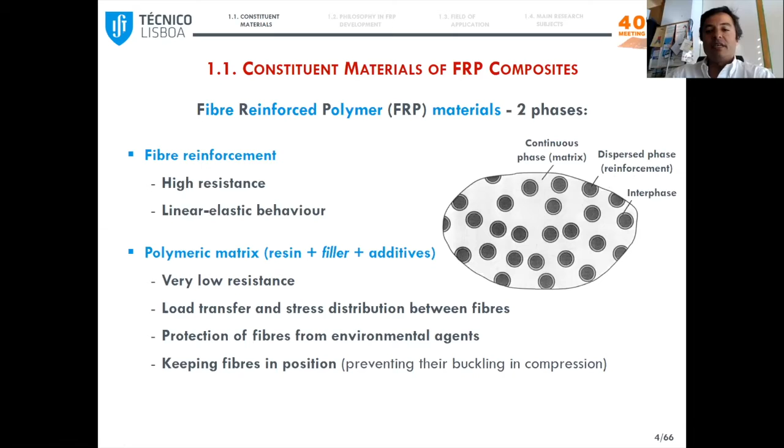So starting with the overview of FRP composites, these materials are basically constituted by 2 phases: the fiber reinforcement, which has high strength and linear elastic behavior, and this would raise a red flag for earthquake engineering, and also the polymeric matrix, which includes resin and usually also filler and additives. The matrix has much lower strength than the fibers, but on the other hand, it has 3 very important functions: load transfer and stress distribution between the fibers, their protection from environmental agents, and also keeping them in position, namely when they are loaded in compression.

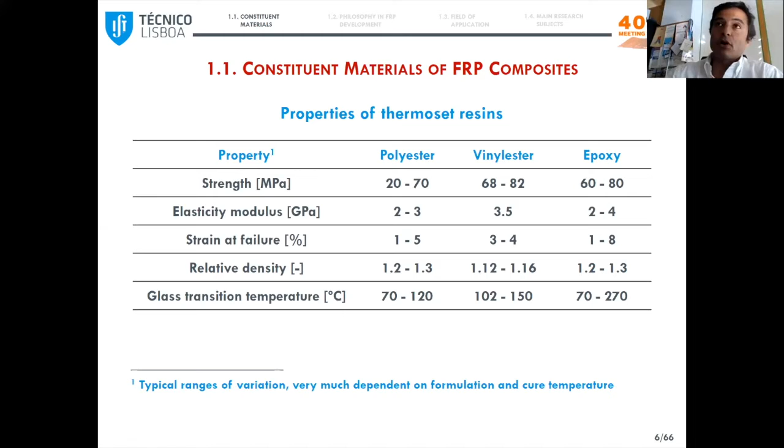Now let's look at the thermoset resins that are more often used with FRPs. You can see that their mechanical properties are relatively similar, being 1 to 2 orders of magnitude lower than those of the fibers. The most relevant difference between these resins is basically their ability to bond the fibers and their durability, which is maximum in epoxy and minimum with polyester.

So the philosophy in the development of FRP materials is that depending on the specific requirements of a given application, it is possible to select the most appropriate manufacturing method and to combine different types of fibers, varying their type, content, position, and orientation, the type of polymer resin, and also the additives and fillers to obtain specific properties. So there is plenty of room for engineering or multifunctionality.

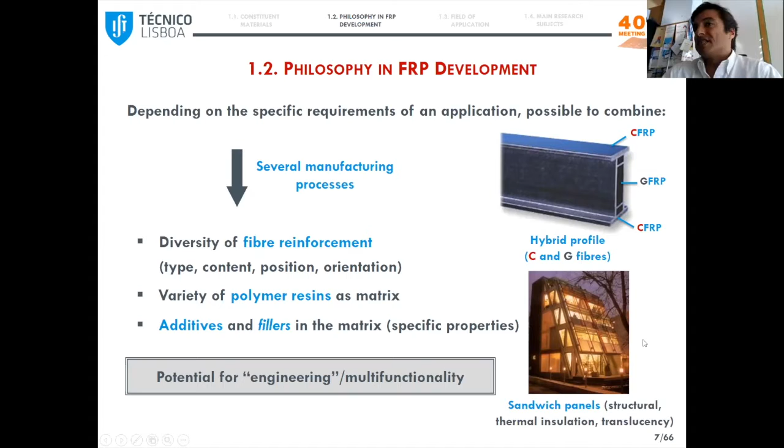Let me give you two simple examples. One is this hybrid profile, where glass fibers are used in most of the profile, but where carbon fibers, which are more expensive, are used in the flanges where they are more useful. And also the sandwich panels used in this building with several functions, not only structural, but also thermal insulation and lighting.

In this slide, I divided the structural application of FRP materials in four main groups: the external strengthening of concrete structures, where strips and sheets are often used, and the internal reinforcement of concrete structures with FRP rebars.

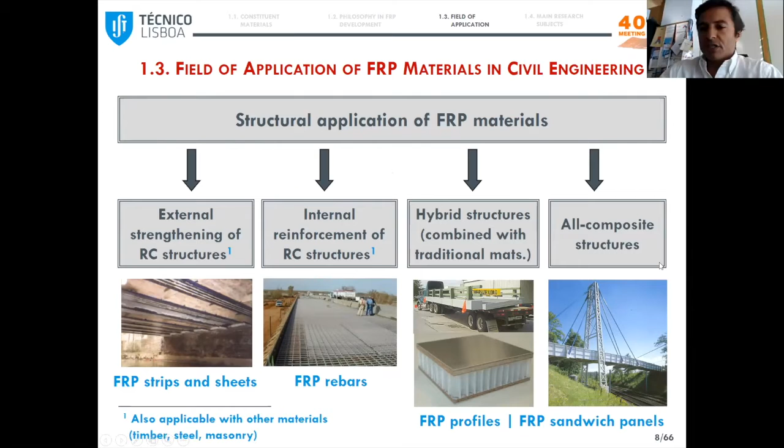Hybrid structures, where profiles and sandwich panels are used in combination with traditional materials, and all-composite structures, where these components are used alone.

This is a bit of a crowded slide. I listed for each of these four types of FRP products the main research subjects that have been relevant worldwide. I marked in bold the ones we have studied at IST, and in blue the topic of this conference, the seismic behavior, which is relevant for all types of products. This will be the focus of the remainder of this presentation.

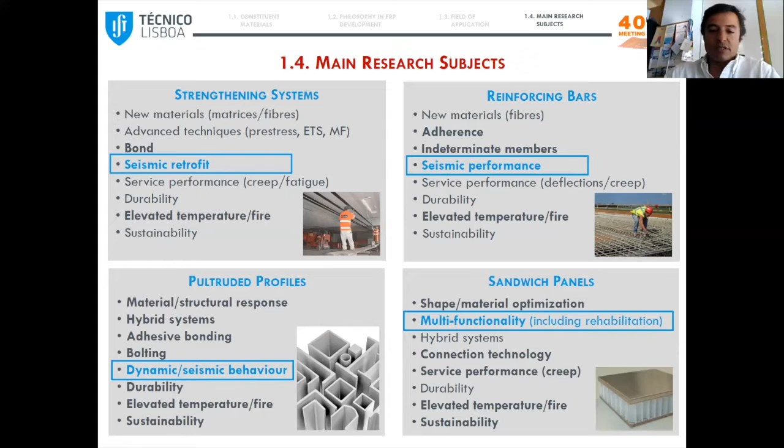For each FRP product, I will show highlights about their main features, and then highlights of research activities at IST. We will first see CFRP systems—here we did not do much research. Then GFRP bars for concrete columns, next GFRP frames, and finally sandwich panels.

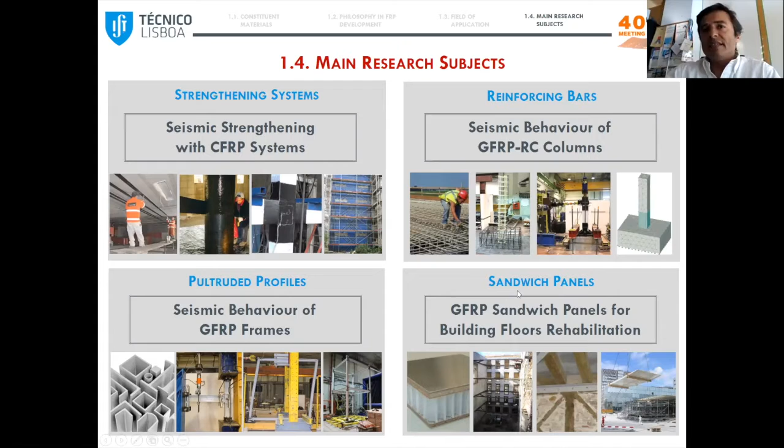Starting with CFRP systems, probably well known for most of you, they are available in two main types: strips with unidirectional carbon fiber rovings, already precured and simply bonded to the substrate of the member we want to strengthen with epoxy adhesive; and sheets with uni- or multidirectional mats, molded and cured in situ, applied by hand layup, impregnated and bonded with epoxy resin.

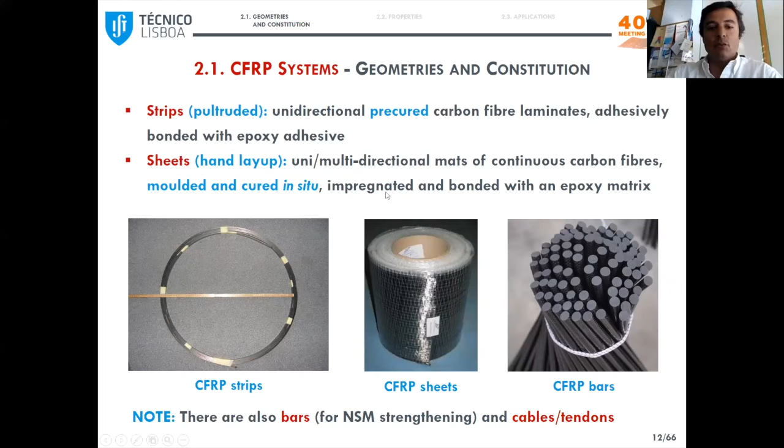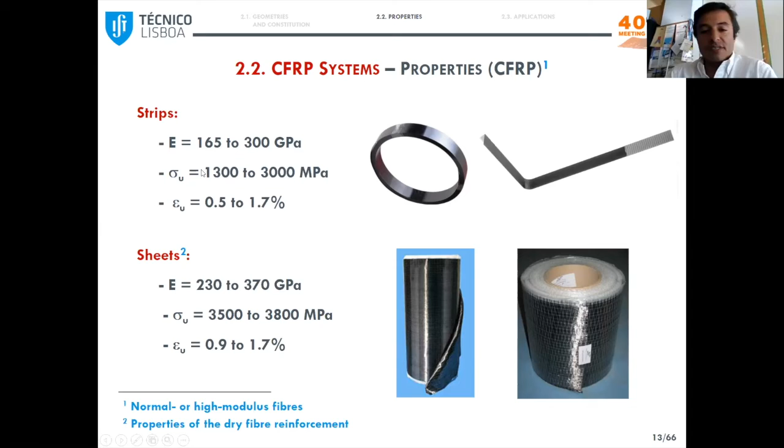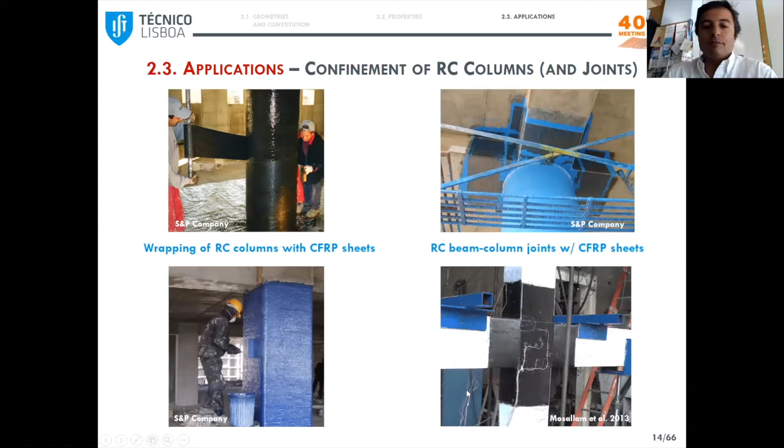Here I show some common applications of CFRP sheets in wrapping columns and also beam-to-column joints, where they provide confinement. Here I try to summarize the principle of this confinement effect.

When concrete is compressed in the axial direction, due to the Poisson effect it tends to expand in the transverse direction. The FRP wrap prevents this lateral dilation, promoting a triaxial stress state. The practical consequence is that both the compressive strength and the ultimate strain of confined concrete increase very significantly compared to normal concrete.

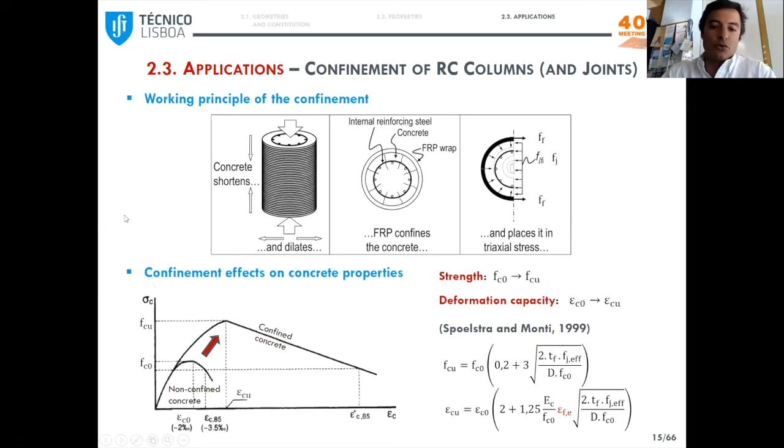At the structural scale, for instance a vertical member under lateral loads, this results in a significant increase of axial load capacity, but also of lateral displacement, ductility, and energy dissipation.

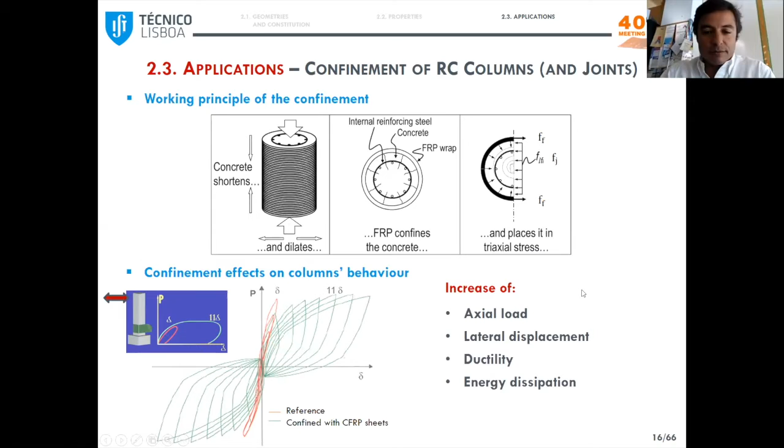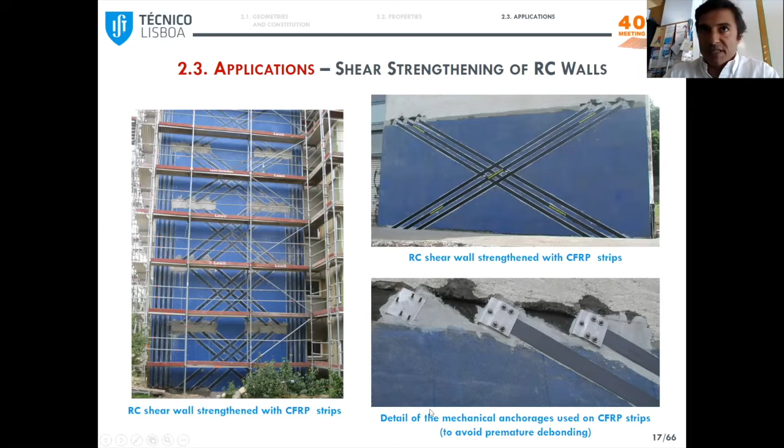Here you can see another application, in this case of CFRP strips installed in a cross shape for shear and seismic strengthening of concrete walls. The strips are bonded with epoxy to the substrate, and they also have mechanical anchorages to prevent premature debonding, which is a typical failure mode in these systems.

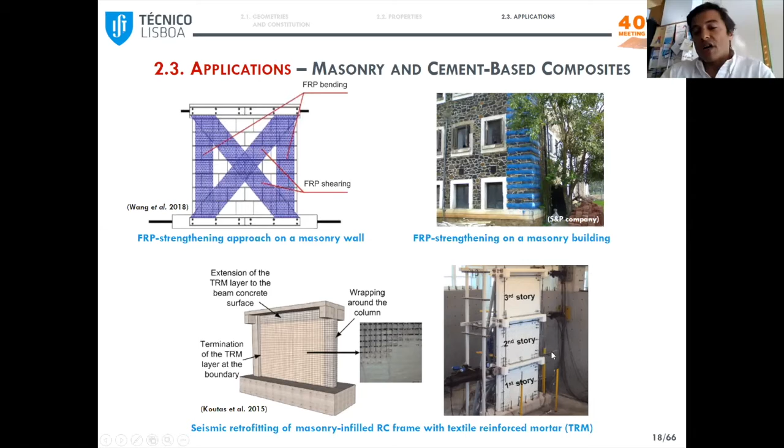Finally, another application of FRP sheets in masonry walls, bonded vertically or in a cross shape for flexural and shear strengthening. Below is a more recent alternative to conventional FRP systems: the textile reinforced mortar systems, which are more compatible with the masonry substrate.

The second topic is the seismic behavior of GFRP reinforced concrete columns, a topic we started to address recently at IST in the context of the thesis of Sousa. First, let me describe the main features of GFRP bars.

In terms of constitution, they are typically made of vinyl ester resin and rovings, so only axial fibers, where we need them. They are available in similar diameters to steel bars and provided with different surface finishing, which already provides quite reasonable adherence to concrete.

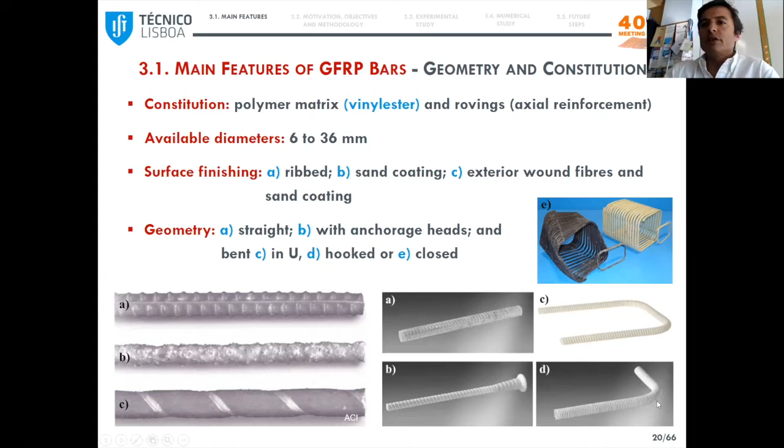In terms of geometry, they are available as straight bars, which you can see here, and bent bars with different shapes: hooked, U-shaped, and closed stirrups.

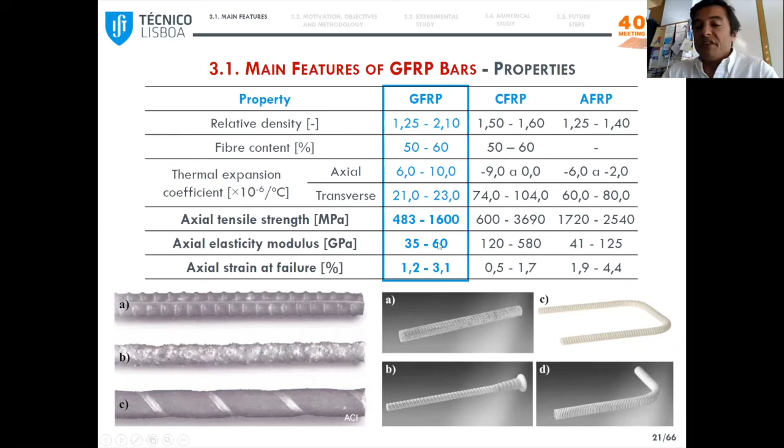Here you can see ranges of variation of different engineering properties. I highlighted those for glass FRP because they are most often used. The tensile strength generally is around 1000 MPa, twice that of steel. The problem is the elastic modulus, which is around 50 GPa, 4 times lower.

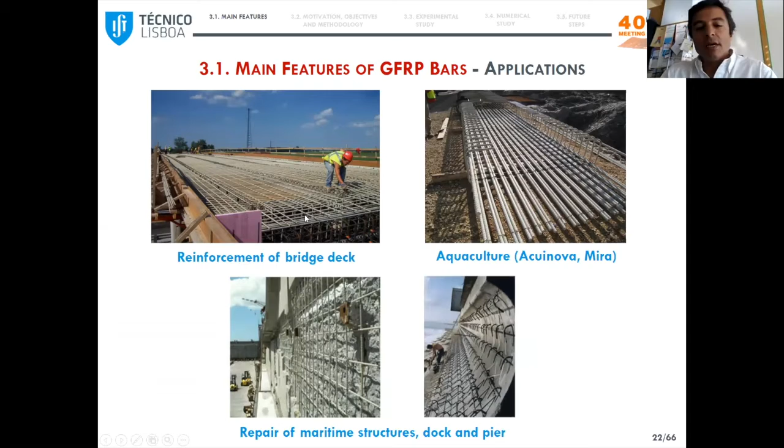Here you can see typical applications in aggressive environments, either coastal areas or bridges where de-icing salts are used in winter. The motivation of this thesis is that, despite their potential, there are doubts and legitimate concerns about the use of this type of reinforcement in vertical members, especially in seismic areas.

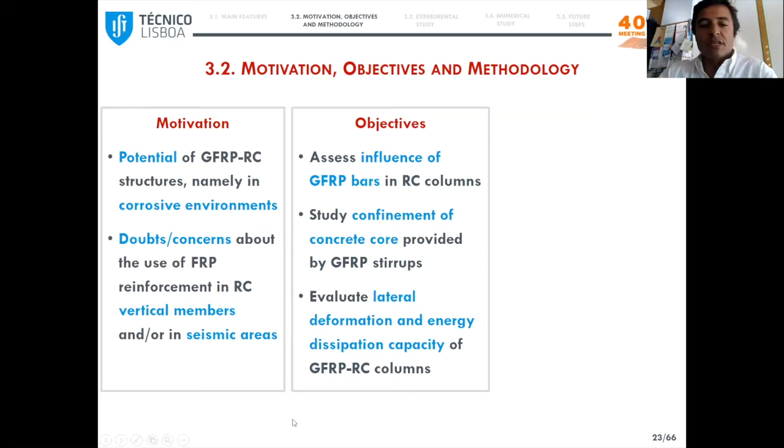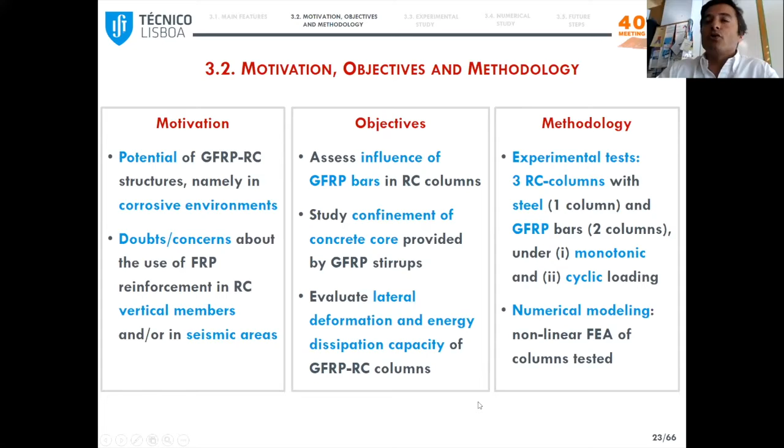The objectives were to assess the influence of GFRP bars in concrete columns, to evaluate the lateral deformation and energy dissipation capacity of concrete columns, and also to study the confinement of the concrete core provided by these closed GFRP stirrups. So far we did 3 full-scale tests in columns, 1 with steel rebars as a reference, and 2 with GFRP bars under monotonic and cyclic loading, and also numerical simulation of these tests.

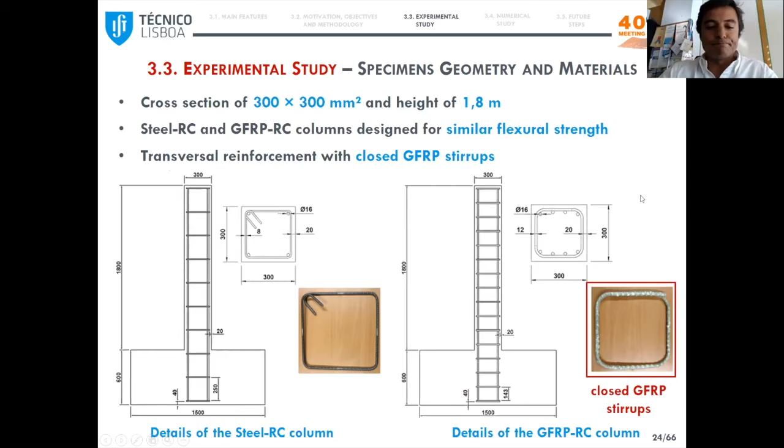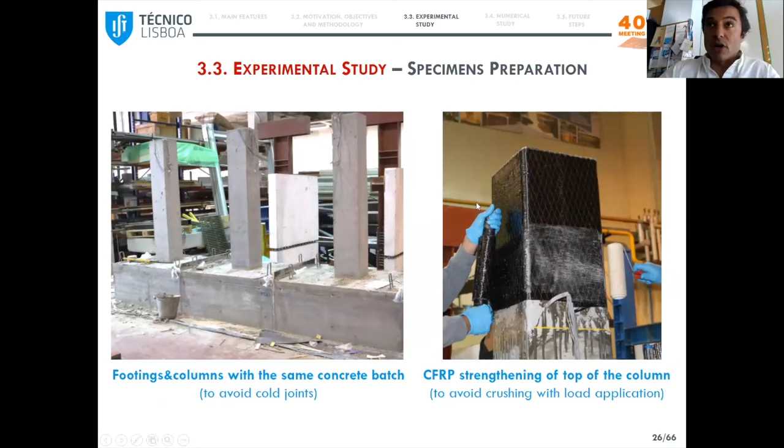Here you can see some details of the specimen's preparation. The footings had only steel rebars. And here you can see the columns after demolding, and a detail of the strengthening with the CFRP sheet at the top of the column to avoid crushing due to load application. This is a view of the test setup.

In the first stage, we applied an axial load corresponding to 20% of the actual load capacity of the columns, and then a lateral load either monotonically or cyclically using a reaction wall.

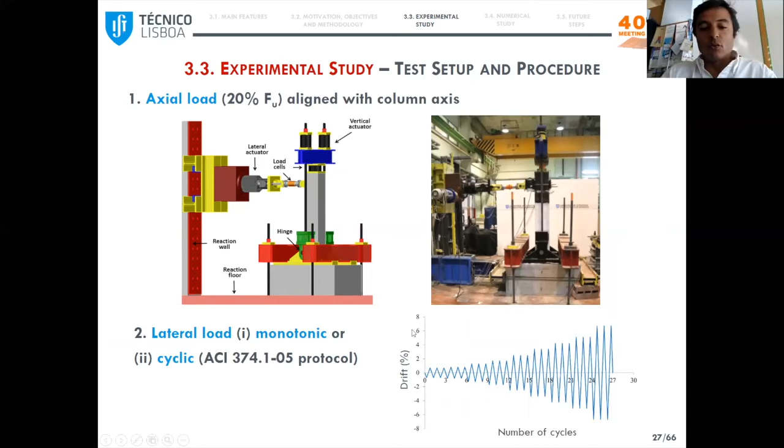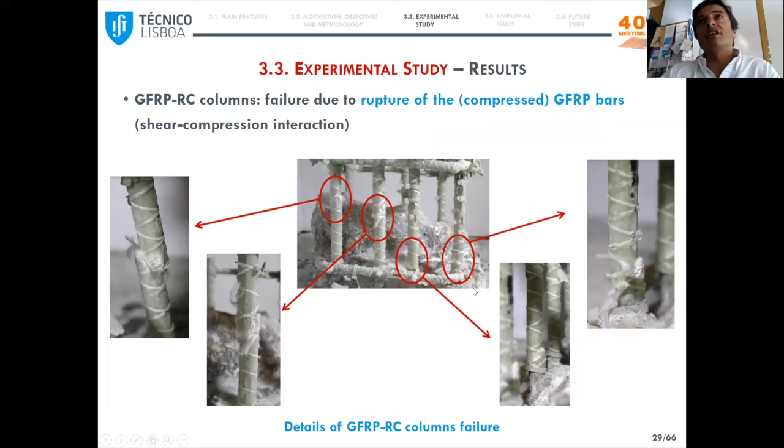In terms of failure modes, as expected, all columns failed due to flexure, with extensive cracking next to the bottom of the columns and formation of a plastic hinge in the steel RC column and what we call an inelastic hinge in GFRP reinforced concrete columns. In these cases, failure occurred actually in the GFRP bars, as you can see here in these photos, due to compression and possibly with some influence of shear.

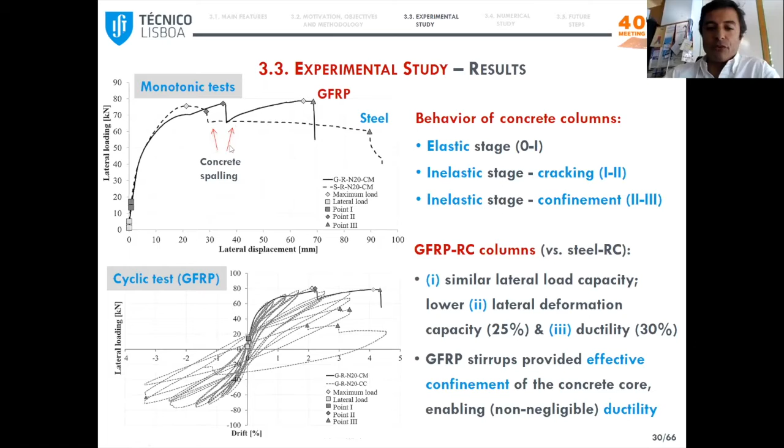When we compare the GFRP column to the steel reinforced column, we can see that it was possible to obtain a similar lateral load capacity, but however, the lateral deformation capacity and the ductility were reduced by 25 to 30%. So this obviously needs to be taken into account, and we need to do further studies to analyze this reduction in performance.

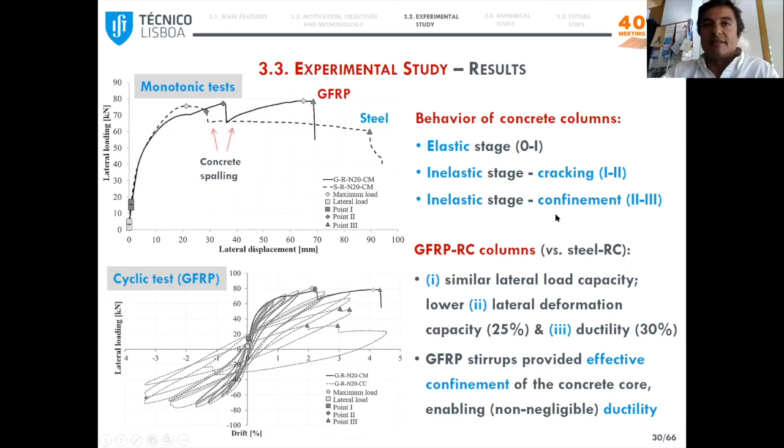On the other hand, the GFRP stirrups were able to provide relatively effective confinement of the concrete core, enabling this lateral deformation capacity. For the numerical study, we used the software Atena to develop 3D finite element models of the columns. Material properties were obtained from tests, as well as the bond slip law used for the GFRP bars. At this stage, for concrete nonlinear behavior, we considered the default parameters from the FE code.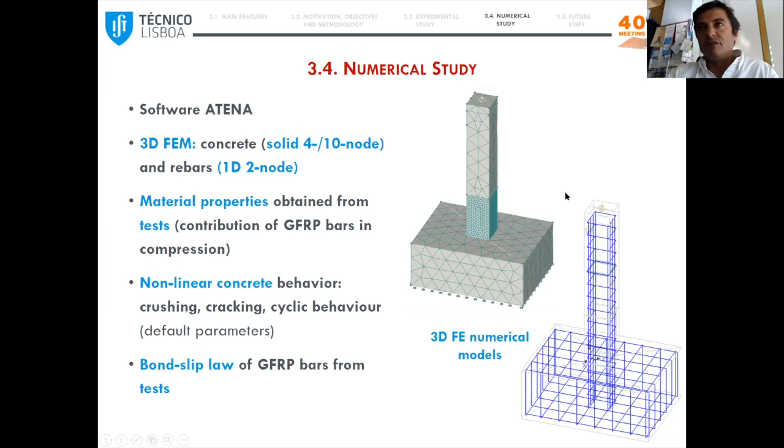So we need still to do some additional research in this topic. Here you can see the results obtained in these preliminary simulations, the comparison between experimental and numerical results for the three different tests.

For the monotonic response, I would say the predictions are relatively accurate. We were able to capture well the lateral load capacity, but of course the models were not able to simulate the spalling of the concrete cover, which then triggered the buckling of steel bars and the failure of the GFRP bars in compression.

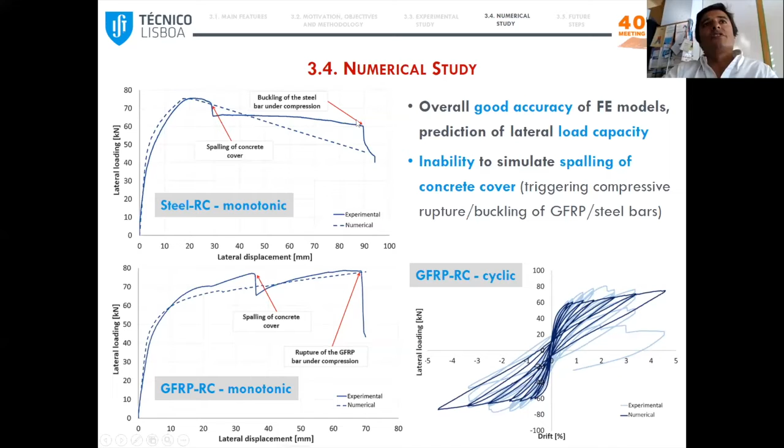As future steps, we plan to do, hopefully in the next few weeks, tests in 13 additional columns with GFRP bars with different axial load levels, and also with hybrid reinforcement. Here the idea is to combine GFRP with stainless steel bars that typically are used in very aggressive environments, to explore the recentering potential of GFRP with the energy dissipation of stainless steel. We expect with this research to contribute to the drafting of design recommendations for this application.

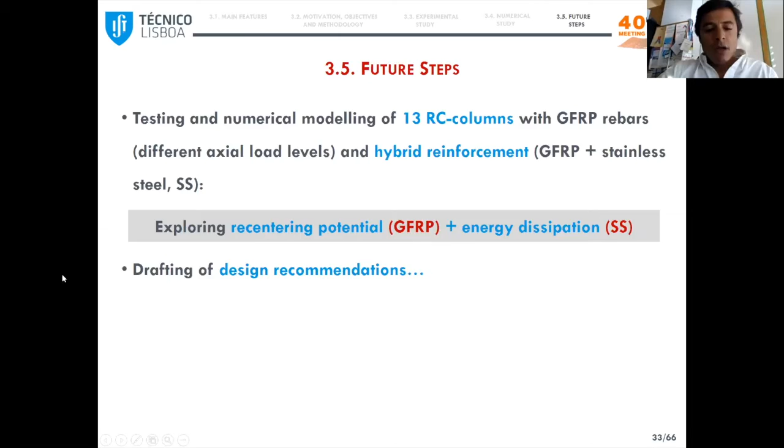Well, for the third topic, it has to do with the seismic behavior of GFRP frame structures, and it has been developed in the context of an FCT project. So first, let me explain what FRP profiles are.

Here in the left picture, you can see the so-called first generation profiles. They basically copied the shapes of metallic construction, so standard thin-walled sections. Later, the composites industry developed the so-called second generation profiles, which are multicellular sections for bridge decks.

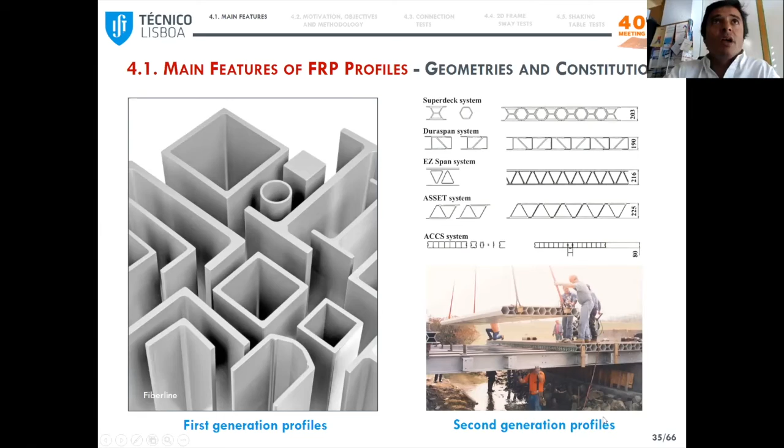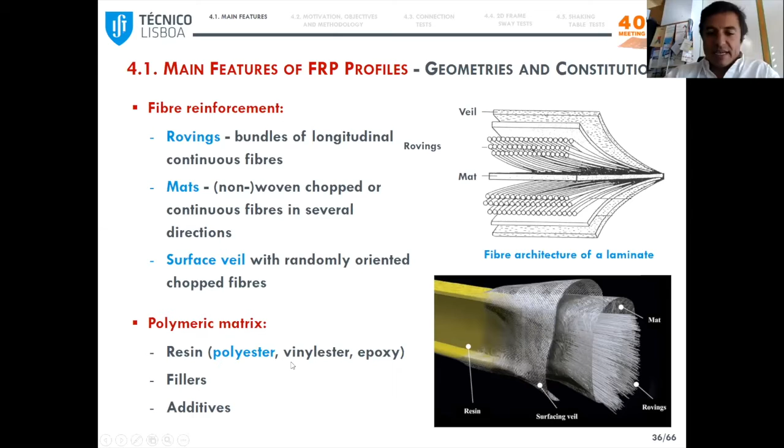In terms of constitution, each wall of one of these profiles is made of different layers of fiber reinforcement that combine rovings, mats, and surface veils, all embedded in a polymeric matrix, typically of polyester. Here I listed ranges of variation of different properties because material properties differ among manufacturers.

First of all, let me recall the behavior is linear elastic for most failure modes. The longitudinal strength is similar to several steel grades, but the behavior is orthotropic, so lower strength in the transverse direction, low shear strength, and also low values of elastic moduli when we have glass fibers.

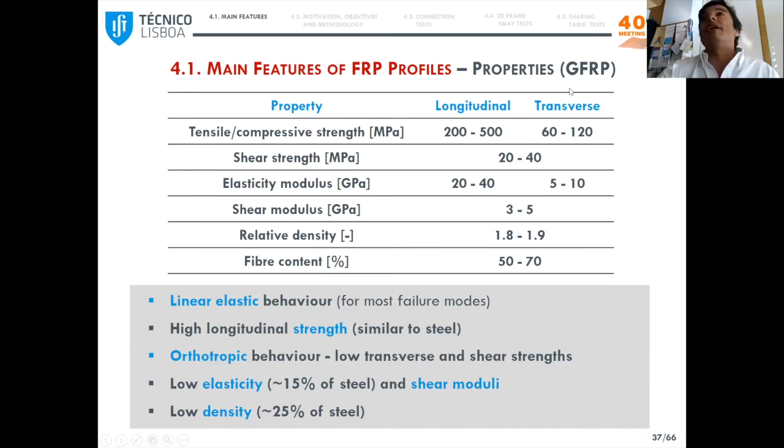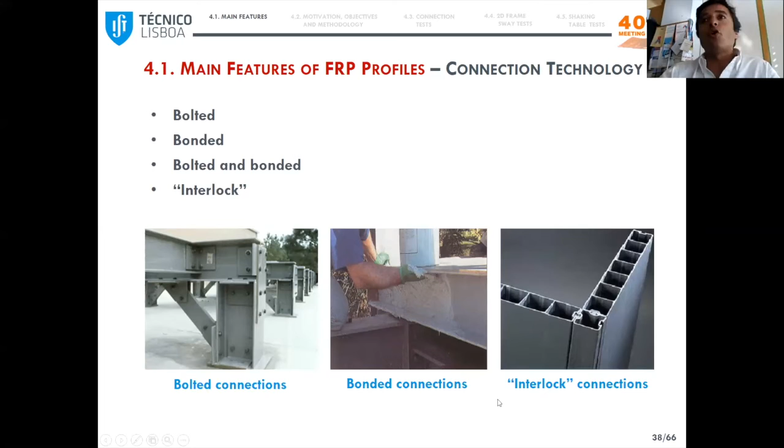In terms of connection technology, that is relatively underdeveloped. These profiles can be joined by bolting, again copying the practice of metallic construction, which has proved to be quite inefficient, or by bonding, a combination of these methods, or mechanical interlock.

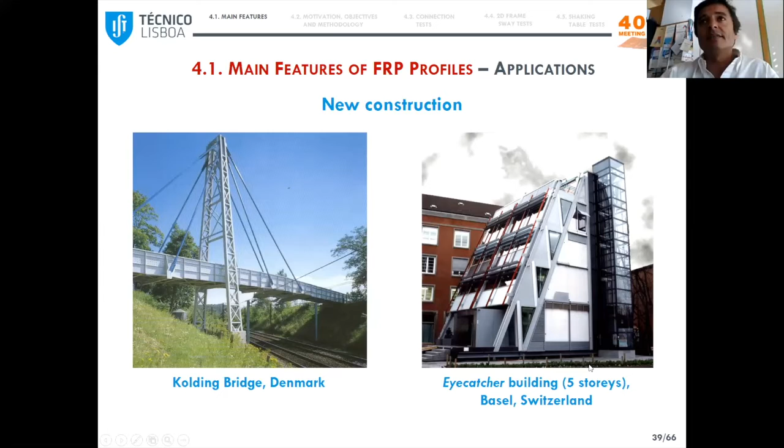Here you can see some applications in new construction of bridges and buildings, and also in their rehabilitation, where the non-corrodibility and the lightness of these materials have been key properties for their selection.

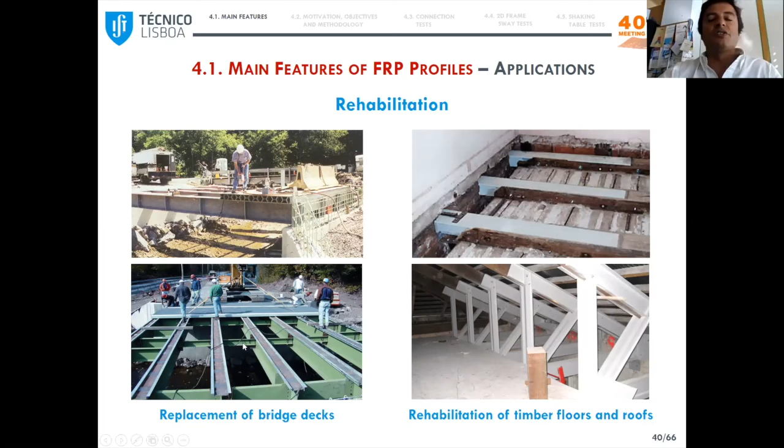So this project on the seismic behavior of FRP frame structures, well, the motivation was twofold. First of all, the proneness to premature and local brittle failure at the connection. We realized that the technology available was not effective.

And then, of course, the same doubts and concerns about the seismic response of GFRP frame structures, for which I should say there is no design guidance available right now.

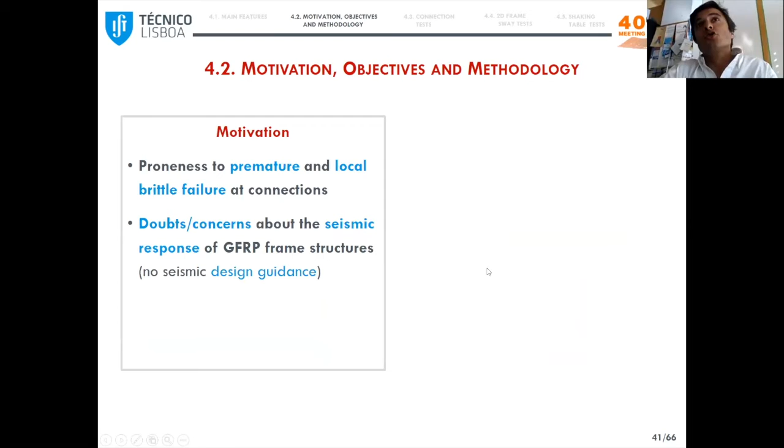So in this context, the objectives were, first of all, to develop material-adapted connections and frame structures with adequate ductility and energy dissipation capacity, where we try to explore the combination with metallic materials, and then at the structural scale, to study the seismic response of such frame structures.

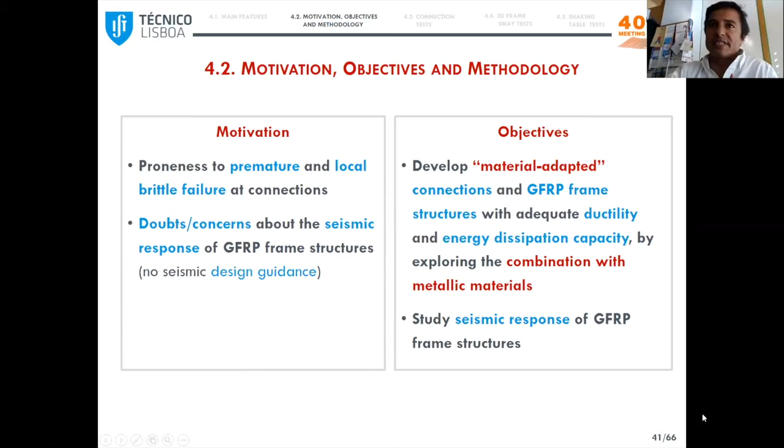So in terms of methodology, the study focused on three levels: beam to column connection tests, 2D frame sway tests, and finally 3D frame shaking table tests.

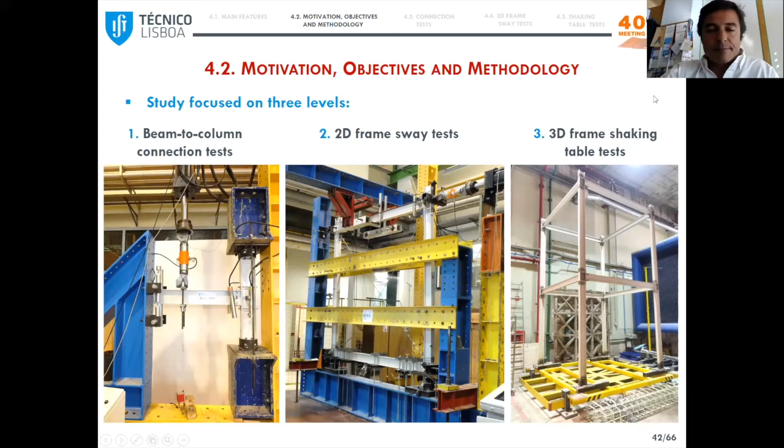So at the connection level, the study focused on two different sections of GFRP profiles: square tubular and I section. And for each shape, we developed two different systems. For the tubular shape, we developed first the sleeve system with a stainless steel part that is positioned inside the GFRP beam and column.

So these parts are not visible. And a cuff connection system comprising an external stainless steel part, which is much easier to install.

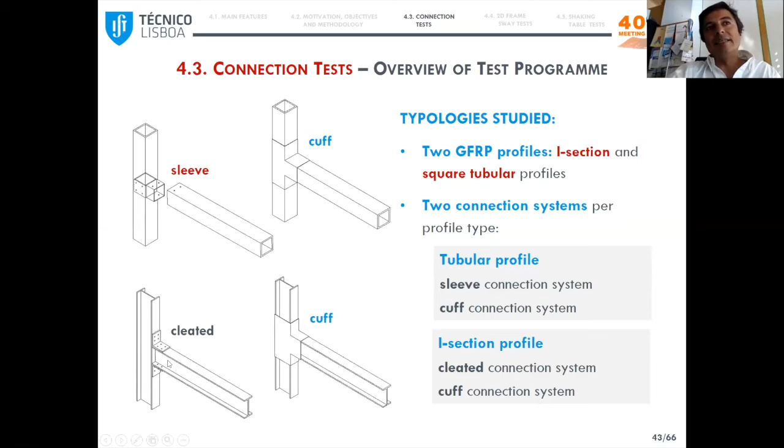For the I section profile, we studied the same cuff system and an additional one involving stainless steel cleats as an alternative to FRP cleats.

So this is the test setup, a conventional setup to test these connections under monotonic and cyclic loading, where we assess these different performance parameters.

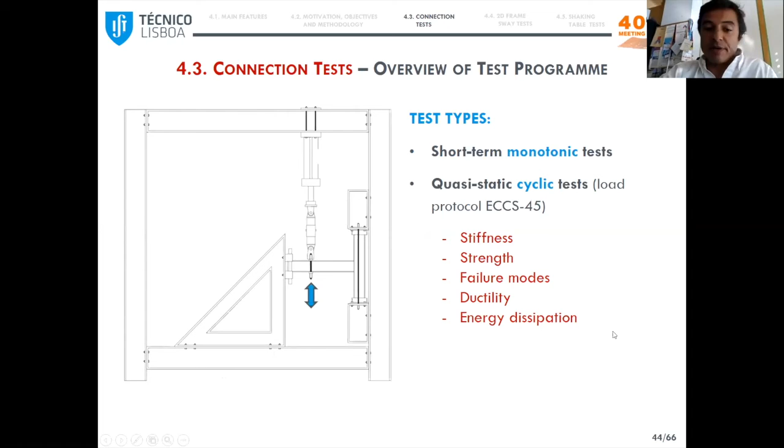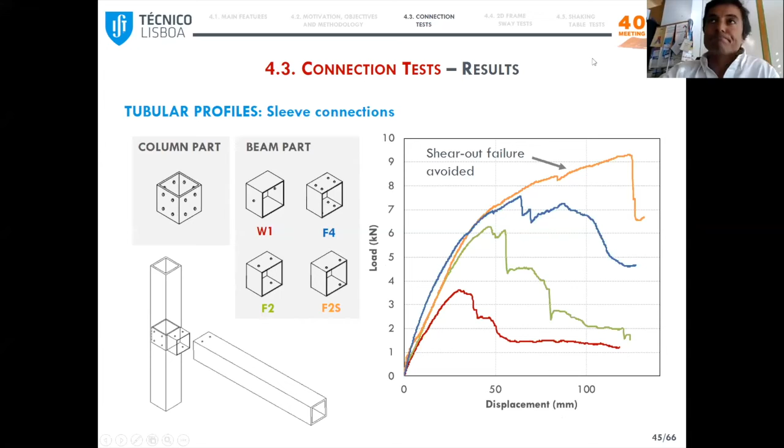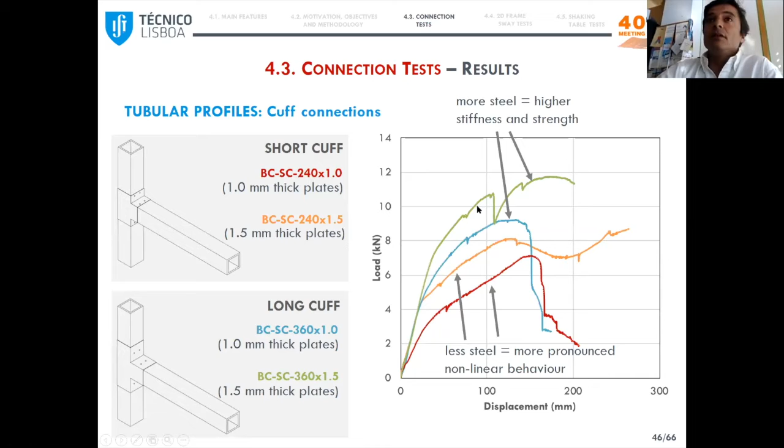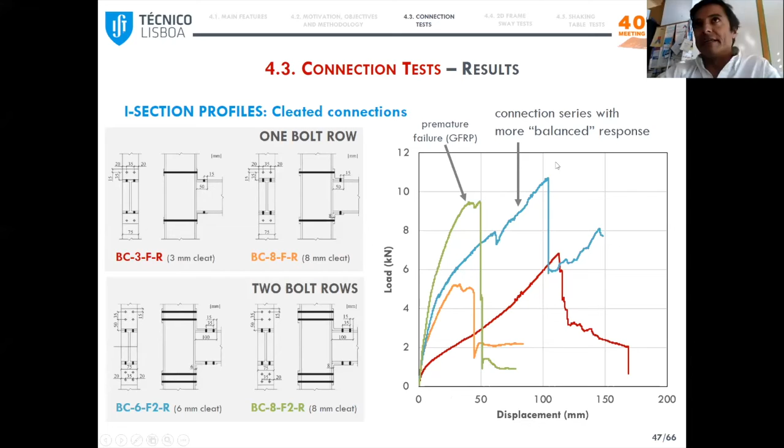So for thinner cleats, the stiffness was quite low, and the response was highly nonlinear because they started to yield for quite low levels of load, while for thicker cleats, although the response was stiffer, we also obtained premature failure modes in the GFRP material. So finally, the option was to adopt intermediate thickness cleats because the response was more balanced.

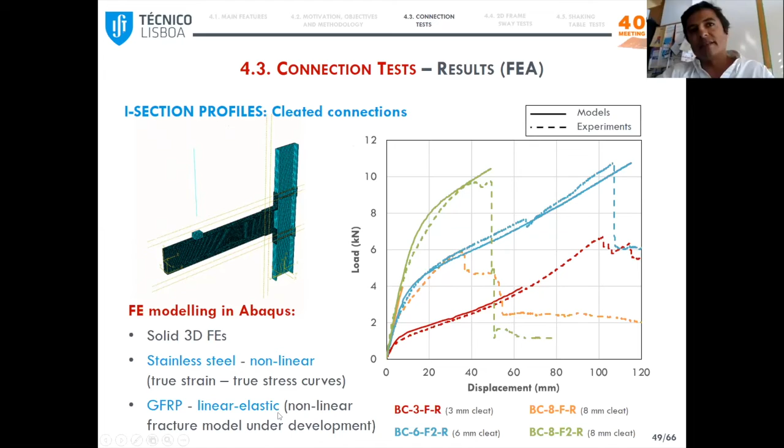So we also did some FEA of these connection tests. This is just an example of the simulation of these I-section profiles with cleated connections. We used Abaqus. Stainless steel was modeled as nonlinear, and for now GFRP was modeled as linear elastic. The response was quite accurately predicted, but failure in the GFRP material is still pending.

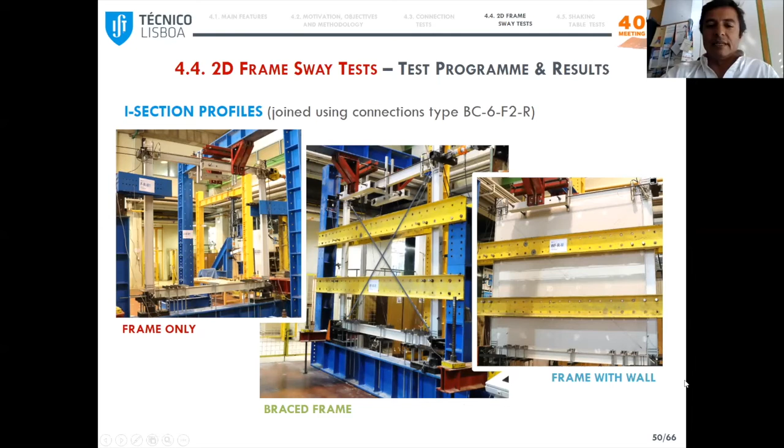On the development of fracture models that are ongoing in our group. So the second step was the study of the behavior of the 2D frames. We used the sections with the cleated connections, as they were the best performing ones. And we studied three different frames: a single frame, then a frame with a bracing system with stainless steel braces, and then one with lightweight partition walls, to investigate their effect.

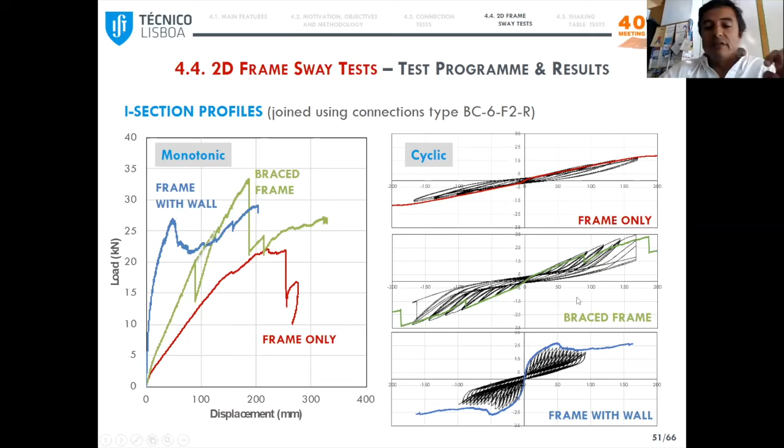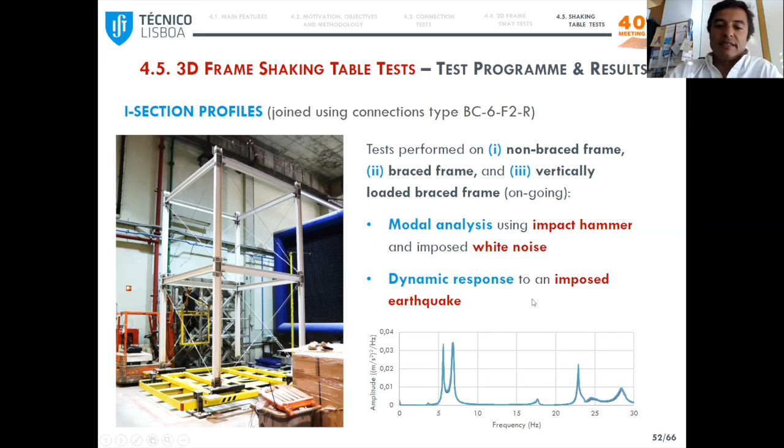In the third and final stage of this study, which is still ongoing in our labs, we are doing shaking table tests in 3D frames, where we are using the connections that were developed earlier, and we are looking at frames with and without the bracing systems. We will also investigate the influence of the loads at the floor levels. So far we already did the modal analysis, including the influence of the bracing systems, and in the next few weeks we will start doing the dynamic tests with imposed earthquakes.

So we get to the fourth and final part of this presentation, about FRP sandwich panels. I should say that this topic is not directly concerned with their seismic performance, but a closely related topic: their potential use in building floor rehabilitation.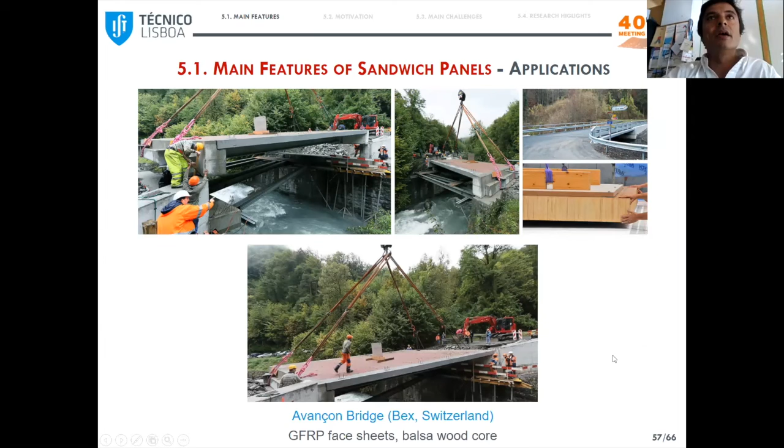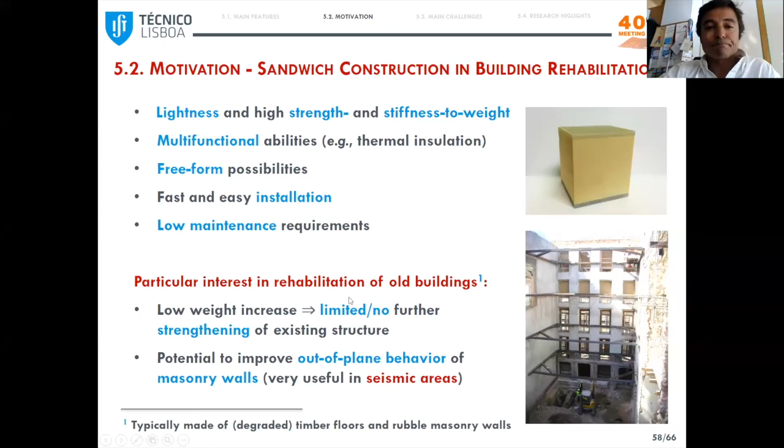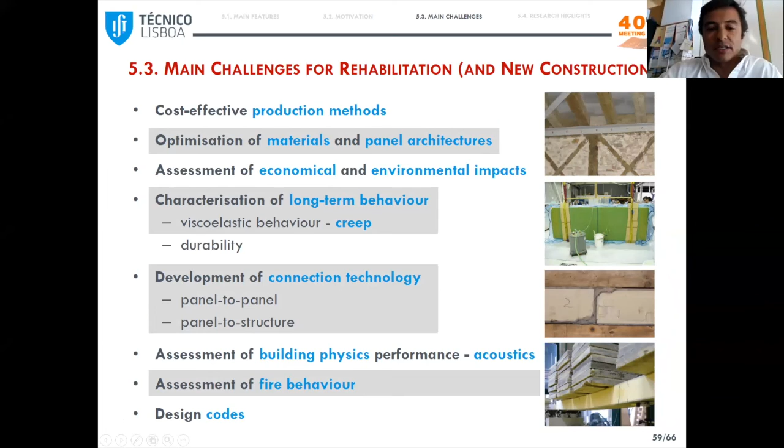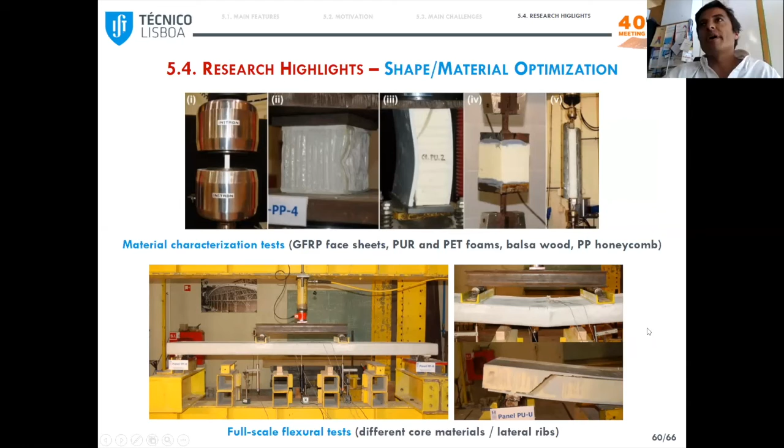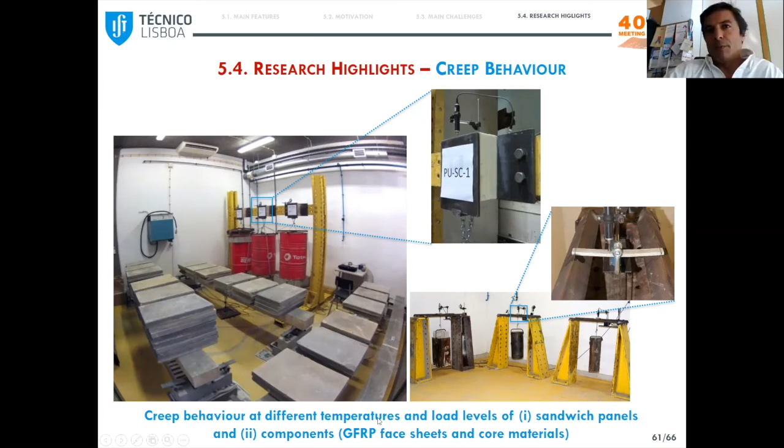We also studied the creep behavior of these materials because they are viscoelastic, not only the sandwich panels but also the different components, the cores and the face sheets, where we looked at the influence of temperature and also of the load levels.

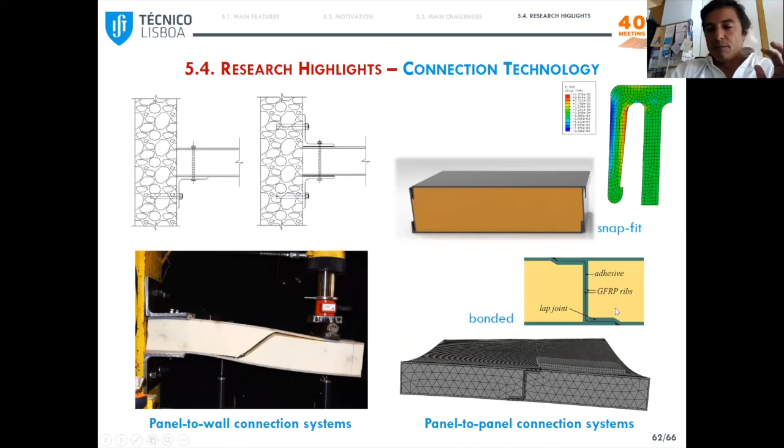Another important topic is connection technology. We addressed it at two levels: first, the connections between the sandwich panels and masonry walls using steel angle profiles, and then the technology to join panels laterally. So we developed bonded connections, and also snap fit or mechanical connections.

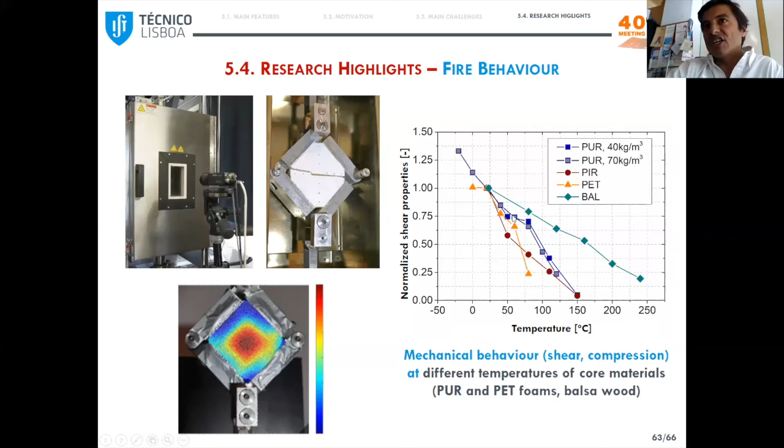And finally, of course, the key topic of fire and elevated temperature. We have been studying the behavior at elevated temperature of the components. Here you can see, as an example, shear tests in different core materials as a function of temperature, and here the reduction in the properties as a function of temperature.

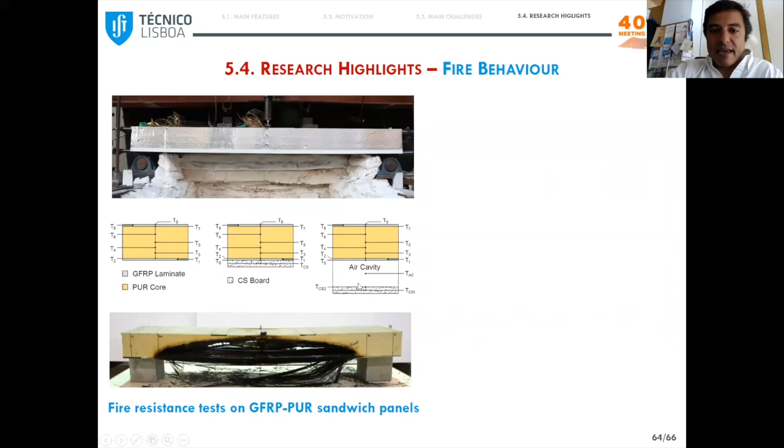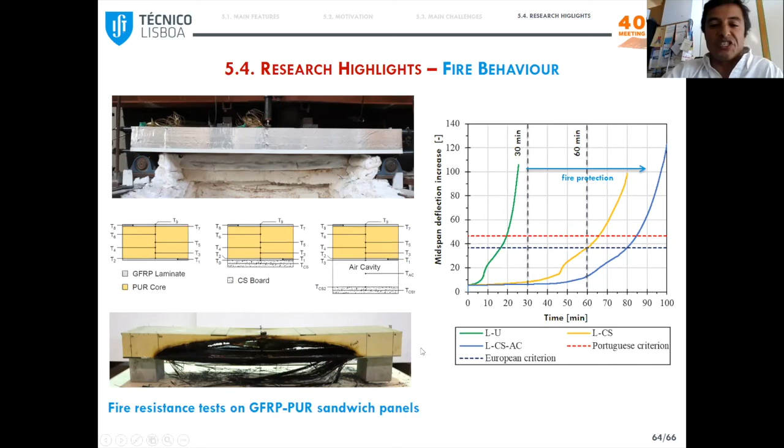And then the fire resistance behavior of sandwich panels without any protection and with board protections, either adherent or with an air cavity. Here you can see a panel after being tested for fire, and here in this plot the mid-span deflection increase as a function of exposure to fire time. Without any protection, the resistance was lower than 30 minutes, and with these two protections it was possible to exceed 60 minutes of fire resistance.

So to conclude, I should say that among the different FRP products that are available, CFRP systems are already a well-established technique for seismic retrofitting. It offers several advantages over conventional techniques.

For GFRP concrete columns, their use in seismic areas is in fact very challenging. Compared to steel columns, they were able to present similar lateral load capacity with an effective confinement of the concrete core. However, one needs to take into account that lateral deformation capacity and ductility are lower than with steel conventional reinforcement.

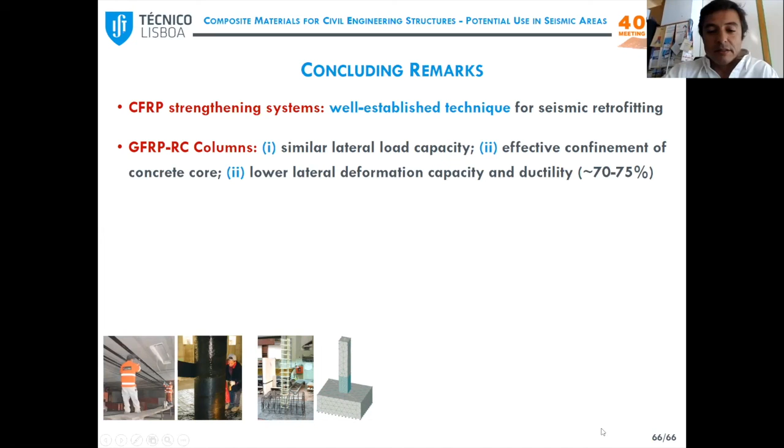For GFRP frames, we found out that stainless steel parts appropriately combined with FRP enable relatively ductile connections. However, when we move to the structural scale without additional bracing systems, the energy dissipation is quite low.

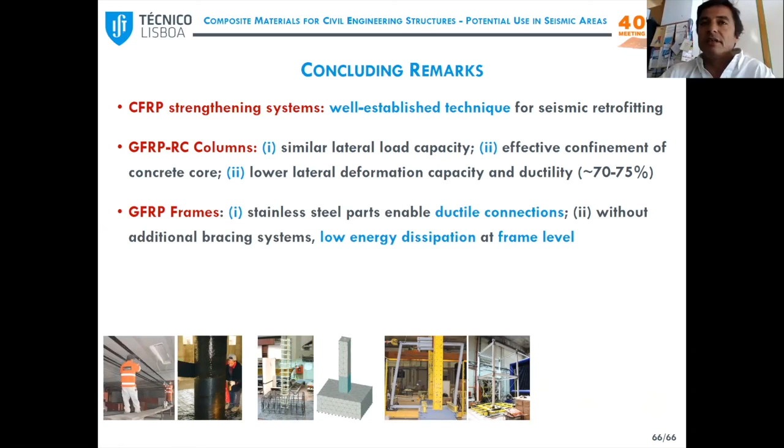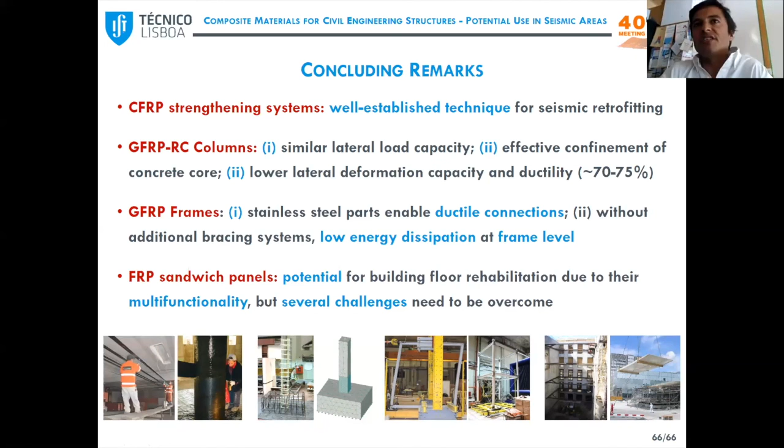And finally, for FRP sandwich panels, there seems to be potential for building floor rehabilitation, especially because they offer several functions in a single layer. But this application, of course, entails several challenges that need to be studied in further depth. And with this, I conclude my presentation, and thank you very much.